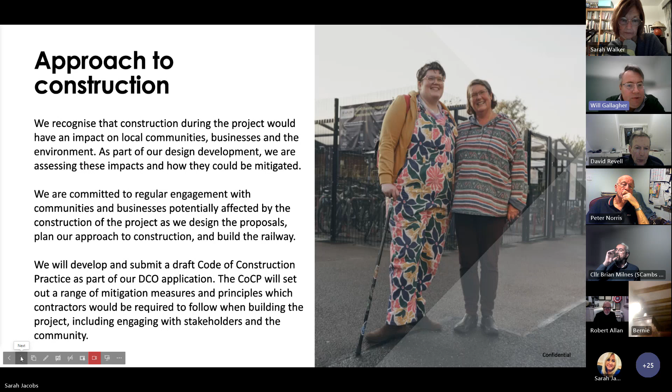As we move on, I just wanted to touch on homes, land and property. We are publishing a lot more information about this scheme, including what is known as the draft order limits, the red line boundary. This is the boundary of the land we need to take, both permanently and temporarily, for example for construction compounds. We'll also be publishing not just that horizontal boundary showing what land is being taken, but also the vertical alignment, the heights and depths of embankments and cuttings.

With that, the Secretary of State for Transport will tomorrow in Parliament set out a safeguarding direction which safeguards the land on which the route is going. This has planning implications for people making planning applications in the area, and it also triggers the statutory blight provisions. What that means is that for those directly affected by the railway, from tomorrow morning statutory blight will apply.

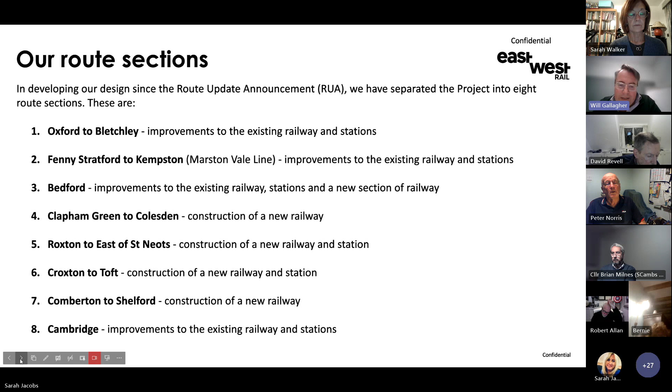So I'll move us on to the next slide and into the next section. This is an opportunity for me to walk you through the key elements of the consultation between Oxford and Cambridge. We've broken it down into eight sections, which you'll see in the documentation tomorrow. I won't be able to cover all the details tonight, but I'll try to pull out some key issues based on the conversations we've had with you over the last few months and years, to reflect what's in the consultation as we move forward. So I'll launch into that, starting with Oxford to Bletchley. Let's jump onto the next slide.

So this really is the section of the railway where not a significant amount of upgrade, on the basis that we have been doing quite a lot of work in this area to get connection stage 1 to work.

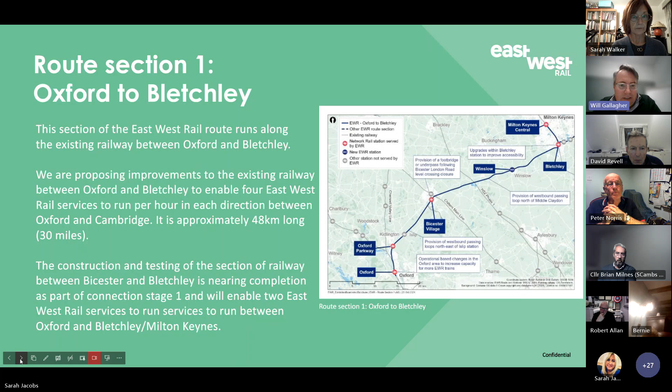If we just move on to the next slide, I think this gives a run through of the key things. First, in the Oxford station area, we're not proposing significant infrastructure development, because we are working on a cross-industry basis to identify operational solutions there, one of which may include East-West Rail services running further south of Oxford, either to Didcot or to Cowley.

So, not significant new infrastructure in the Oxford station area, but an operational solution. We are testing that the existing stations on the line have the capacity they need to meet future demand, considering what is required for future years. We will also be making provision for train crew accommodation.

In this section between Oxford and Bletchley, there is also the level crossing at London Road, Bicester, and we'll come on to that in a second. We're putting passing loops in the Islip and Middle Claydon area, and we may need to provide some diversion for overhead electricity utilities necessary along the route.

So as I move us on, actually let me very quickly touch on the London Road level crossing. What we are proposing there are a couple of options at the crossing itself: either a bridge to go over the railway for pedestrians and cyclists, or an underpass to go under the existing railway.

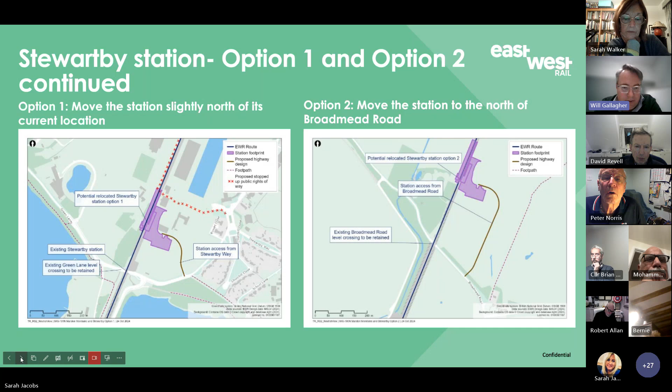As I move us on, having a look at the section into Bedford, so a number of works in the Bedford area.

Relocating the Bedford St John's station from its current location to the site of the current Britannia Road car park, so therefore much closer to Bedford Hospital, essentially the Bedford Hospital station. We would build a new multi-storey car park on the hospital-owned land just west of the railway.

I think it's worth saying, because I know this has been a question for people, but we would replace like for like the number of car parking places. The car parking places needed for the railway would be replaced on a 1-for-1 basis, and we would do that before taking those spaces away to build the railway. So there would be no loss of car parking spaces at any point for the hospital.

We also have in this area, we're proposing to move Jowett Sidings to Cauldwell Walk, for those who know the area, because we need to do that to make sure we've got the route for the tracks from Bedford St John's into Bedford Station.

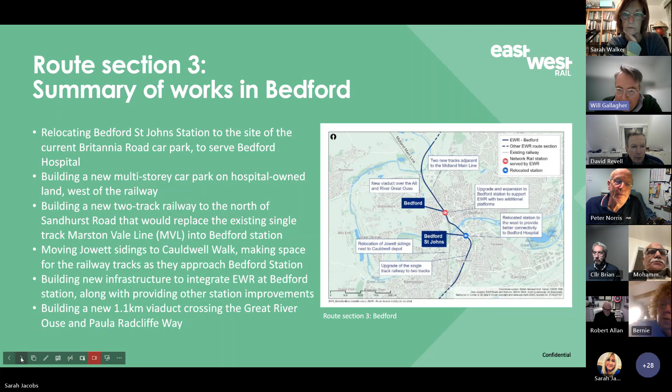Moving the station south toward Ford End Road Bridge, a new station concourse with new East West Rail platforms. As I noted earlier, because we've been able to extend the services to Stewartby, moving through Bedford, we've actually managed to reduce the railway footprint here, which has made the use of the site more efficient.

I think it's also worth saying, because I know this has been an important thing for people locally, the houses on Ashburnham Road that were concerned they might need to be purchased or demolished are no longer at risk. We've found a solution that means those properties on Ashburnham Road are protected. Obviously in this area also a new multi-storey car park and surface car parking.

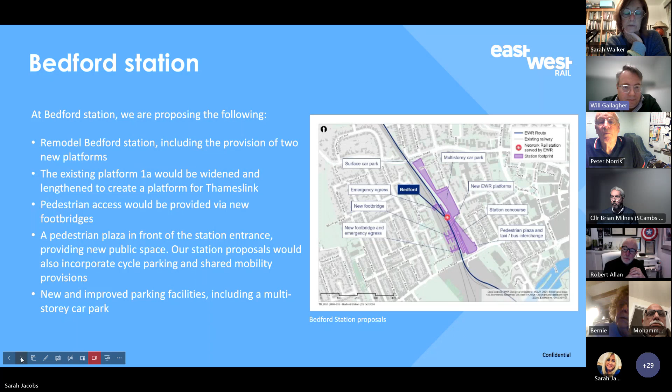I'm going to move us on to talk about the Poets area. As people know, we are taking the 6-track option north of Bedford to ensure that we can provide a reliable service and ensure that the timetable works for East West Rail. That does, as we know, have an impact in the Poets area.

We did test again in preparation for the consultation whether an alternative solution was possible, and none of the modelling suggests that it is. The number of houses to be demolished in this area has not changed. It remains the same as we said at RUA.

There are a number of properties where we are going to need to take part of their garden in a way that we were not originally planning, but that is to reflect work we've done on the road network, turning circles, those sorts of things, to make sure the traffic movement in the Poets area works as it needs to.

But for those houses that are highlighted here, they will benefit from the statutory blight provisions that come into effect tomorrow.

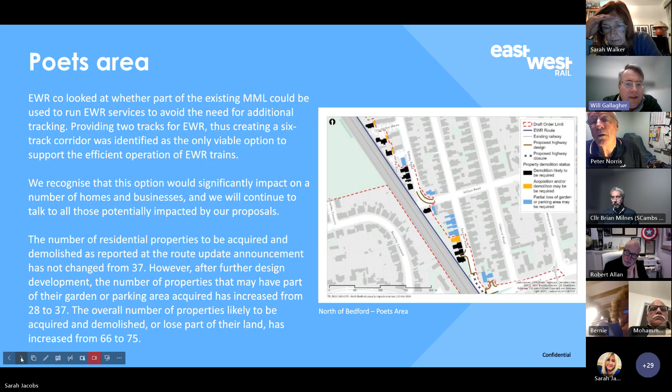I'm going to move us on to look at the area that moves from Clapham Green up to Colesden. We head north out of Bedford Station, across a series of viaducts, embankments and cuttings, also passing loops in the Colesden area, and we will be building new bridges to maintain roads and public rights of way. There is quite a detailed explanation in the consultation documents of how those public rights of way in particular will be moving, will be protected, and the routes for those.

Also worth saying that we have moved the proposed alignment of the railway slightly to the north, and that is motivated to increase the distance from the railway line to the properties in the Wilden area. So we have adjusted the alignment in this area to move it further away from Wilden.

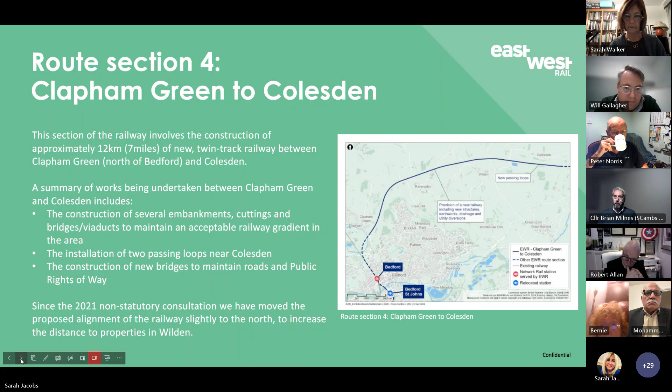So as we move on to the next slide, looking at Roxton, the Roxton area through to east of St Neots. So primarily in this area, I'll focus on the alignment in the Tempsford area.

So if we move on to the next slide, you will remember at the route update announcement, we confirmed that we had alignment 1, but with a preference for the Tempsford variant that swung south of the Black Cat roundabout and served a potential Tempsford station a little bit further south. So we've had a look here at what the alignment options might be, and we've refined that Tempsford alignment to be alignment 1B. That's the more southerly of the bright blue lines.

But we also developed an alignment 1C that more closely hugs the alignment of the A421. That is in part because as we begun to investigate alignment 1B a little bit further, that would need to be on quite a significant viaduct in this area, and therefore we wanted to present an option that wasn't on a viaduct for quite so long or quite so high. So we've looked at alignment 1C, which is also a cheaper alignment than alignment 1B.

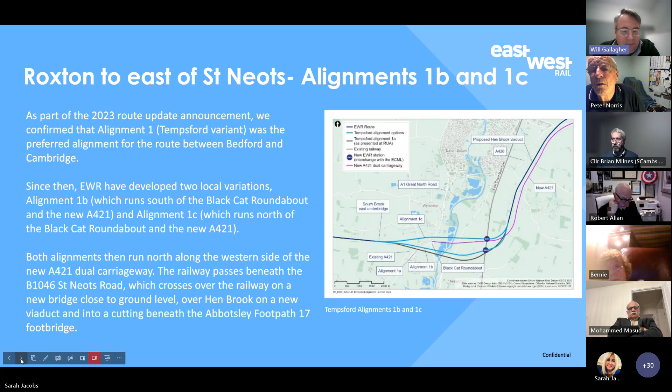As I move us on to the next slide, what I also wanted to draw your attention to is two potential locations for a logistics hub. This would be a temporary rail logistics hub to allow us to build East West Rail. There are a couple of options there.

They do in part rest on which of the alignments is chosen in the Tempsford area. It's one of the reasons why we're consulting on the two, the pink and the blue areas. One reason for having a rail logistics hub in this way and at this location is it would allow us, once the track is constructed, to bring in more materials by rail rather than by road, and therefore would reduce the amount of construction traffic on the roads, both pointing out from this area towards Bedford and towards Cambridge. So we do see some advantages because it could have beneficial environmental and community impacts in this area.

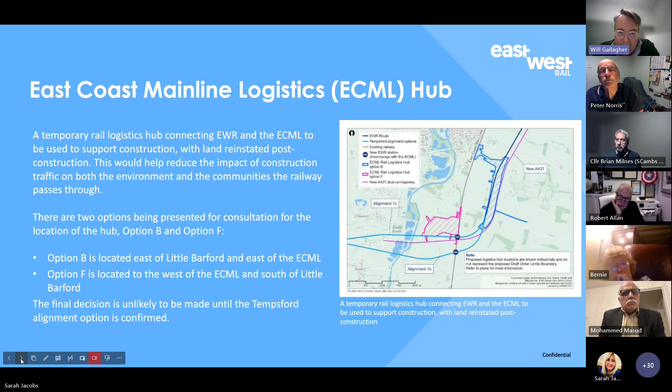I'll move us on to look at the route section that runs from Croxton through to Toft. This is about the stretch of railway that follows the line of the 421, as it will be, over to Cambourne, the construction of a new Cambourne station, and then how the railway turns to the south.

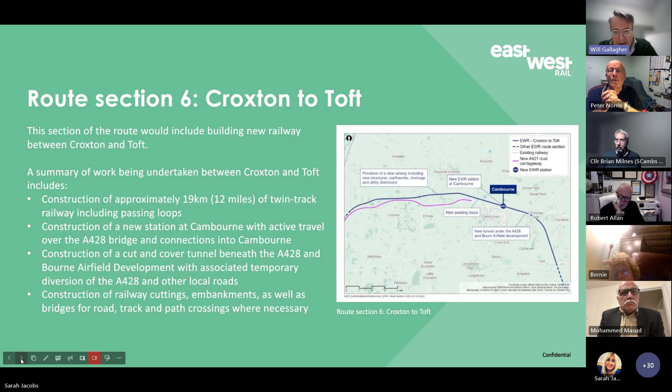This shows you the proposed location for the Cambourne station, just north of what is currently the 428, soon to be the 421, at Cambourne. This is something we are going to continue to develop to make sure that as plans for the growth of Cambourne come forward, this is fully integrated into those plans.

Again, just a reminder that it would be 4 trains an hour serving Cambourne station. During the morning rush hour it's about 50 minutes into town from Cambourne, just to do the 9 miles there, but this would reduce the time to less than 15 minutes from Cambourne.

Moving on, I think we are addressing some of the concerns we heard raised about the route into Cambridge from here. We would actually put the East West Rail line into a cut and cover tunnel to go under the A428. We would temporarily slightly realign the A428 road so we could construct the cut and cover tunnel, but it would mean we can bring that line through that corner of Bourn Airfield with less disruption, not completely without disruption, but significantly less in the long term, and also without the visual impact people were concerned about in terms of the potential viaduct there.

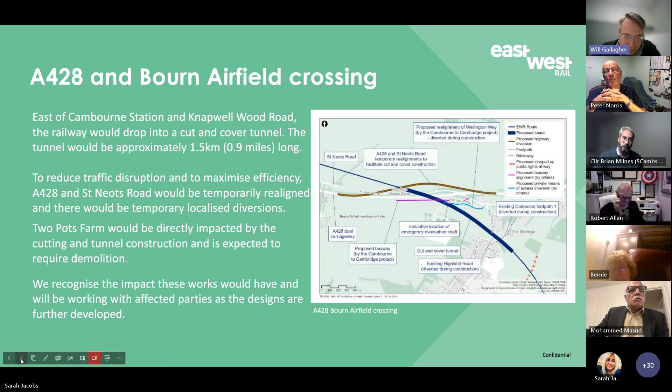As we move on to the next slide, we come to the route section from Comberton to Shelford. We construct the new railway that runs past Comberton, passing between Comberton and Toft in a cutting, and then it takes a tunnel through Chapel Hill, south of Haslingfield.

I know that was again a particular area of concern, and we are now able to confirm that will be about a 700-metre long tunnel for the railway travelling beneath Chapel Hill, which again helps us ensure we can keep the railway as low as possible travelling through this part of South Cambridgeshire.

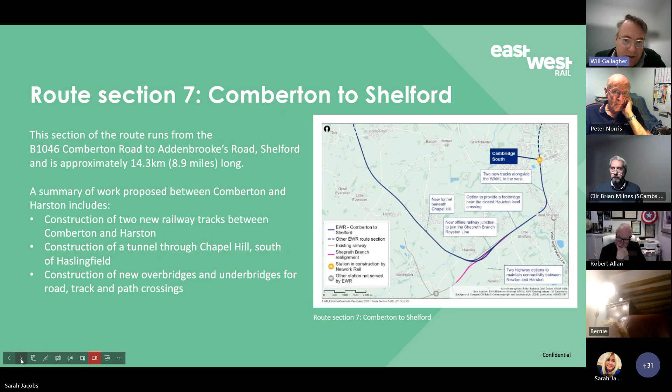As I move us on to the next slide, once we get into the Harston area, so Hauxton Junction, the solution we have come up with in this area means we realign the Shepreth branch line to allow us to create a grade separated junction. Rather than going over the A10, we realign the A10 to go over East West Rail, which allows us to keep East West Rail relatively low.

But we do then need to bring the West Anglia main line, the Shepreth Branch Royston line, up and over in one area, so that we achieve that grade separation at Hauxton Junction. That grade separation is what then allows us to use the existing line through to Shepreth Junction without needing to widen the Shepreth branch line at this point.

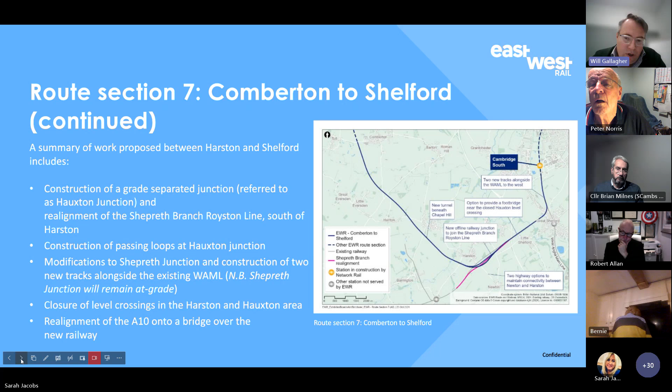Moving to the next slide, this describes Hauxton Junction in a bit more detail for those of you particularly interested in this area. As I've said, the Shepreth Branch Royston line would be diverted over East West Rail in this location, but this is all part of us trying to find the most efficient and effective solution in this area, and also keep East West Rail as low as possible in the way that we do this.

I do want to just touch on two level crossings in this area as well. So if we move on to the next slide, the Harston level crossing on Newton Road.

We've been looking at this very closely, trying to find the best options to avoid separating these two communities. We do realise how important this is to people.

We are presenting two options for people to consider, as well as considering a new accessible footbridge about 400 metres east of the existing Harston level crossing. First option is to divert Newton Road to the southwest of the existing road, passing over the Shepreth Branch Royston line's new location before heading west to join the realigned A10.

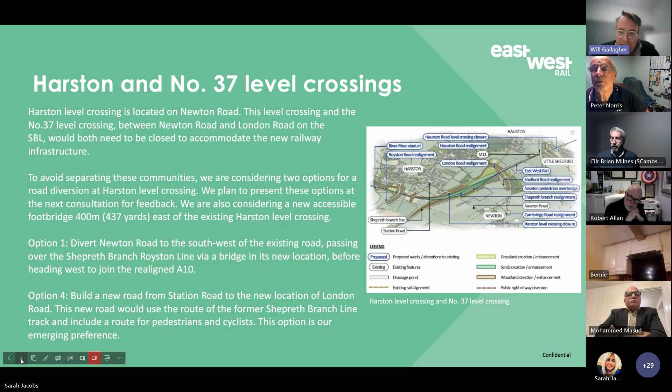The second option is that we build a new road from Station Road to the new location of the London Road, using the route of the old Shepreth Branch line track, which would also include a route for pedestrians and cyclists. At the moment, we think that option is our emerging preference, developed to try to avoid issues of turning right onto the A10, which we know were significant considerations for the communities there.

Moving on to the Hauxton Road crossing, we're proposing to close the Hauxton Road level crossing. The level of traffic with East West Rail makes that crossing unsafe. We recognise how important level crossings are, and the safety concerns that come with it, but in this location we can't get to a place where that crossing is safe, so we would need to close it.

As you can see on the left of the diagram, we're providing a new bridge over the railway just west of Little Shelford, linking the High Street with Newton Road. We're also looking at a footbridge at the location of the existing level crossing. So both a road diversion with a new road built and a footbridge at the crossing.

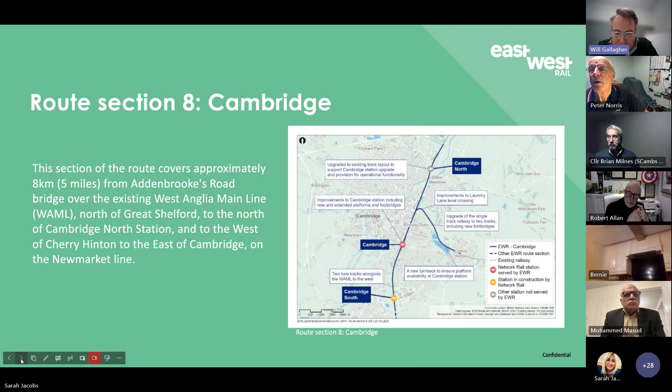Moving on to the route section into Cambridge, this picks up where we join the West Anglia Main Line and head north towards Cambridge. We will need to lay 2 new tracks along the West Anglia Main Line so that we've got 4 tracking. There's already 4 tracking happening around the new Cambridge South Station, but this would mean we have 4 tracking further south and further north of that.

Looking north, we would need to demolish the overbridge at Long Road and build a new bridge able to span the 4 tracks. We recognise there are blue light considerations in terms of access to Addenbrooke's Hospital, so we're working very carefully to minimise the disruption.

The other thing we've done here, rather than terminating at Cambridge, is look to run trains from Cambridge around, north of Cambridge Station and onto the Newmarket line towards Cherry Hinton, putting a new train turnback facility there. That means we don't have to do quite as much work at Cambridge Station itself, which saves money and disruption in Cambridge.

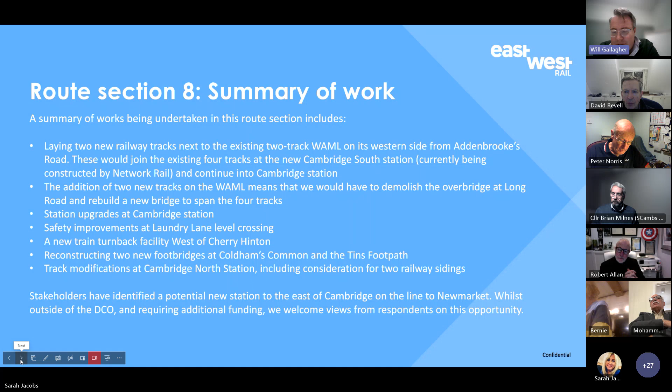And we envisage that starting in December of this year, so starting next month, and then continuing all the way through next year. So quite a significant uptick in our engagement at a technical level in terms of developing the design with those host authorities.